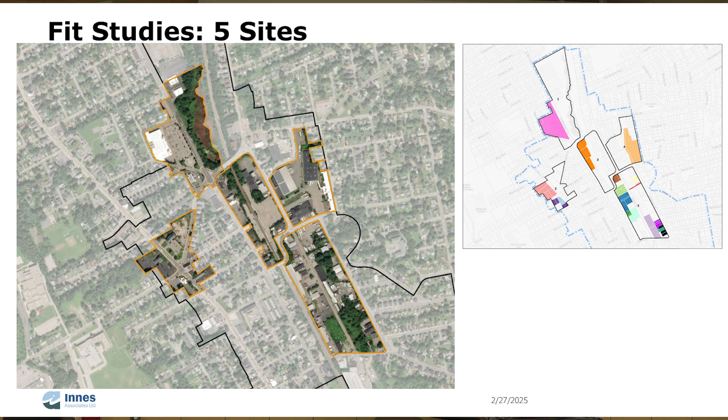So we have selected these 5 sites, and we are going one by one to see what we have proposed. Just keep in mind, this doesn't mean that this is going to be the result. It's just one possibility that we envision. And this is very long term. It doesn't mean that it's going to come tomorrow. This is something that could happen in the future.

What we've heard from the residents in the previous public meetings was about a walkable neighborhood, more commercial and mixed use. Commercial, not the car-oriented type of development, but more pedestrian. So a little cafe, a small restaurant, a convenience store, things that are a smaller scale and for people walking. So we took that into account, and what you can see here is the existing.

We have the Stop and Shop, we have the big parking, and then Albion Street has a different level, so it's going up. Let's say that this is 0, and going up is 1 level up, so 10 feet up, and then again we go back down. So we are taking that level difference into consideration for the plan, and we will see it later.

One of the biggest changes that we are doing, besides obviously giving a mixed-use area where we have commercial towards North Montello Street, is we activate the wetlands area and have it more for public engagement, so people are able to use the space. And then the residential areas will go in the upper levels or towards Larrie Avenue, Newton Avenue, and Albion Street.

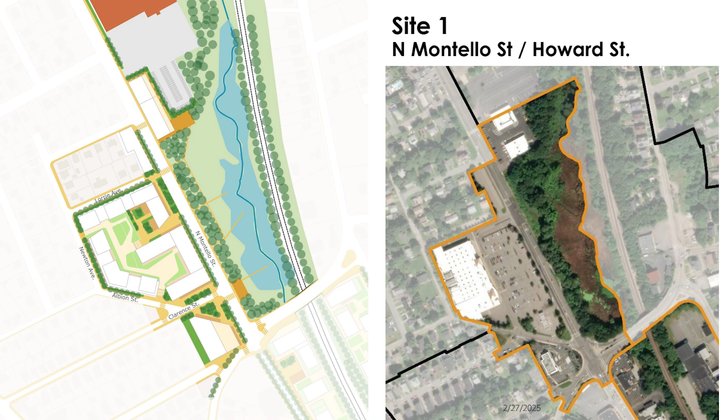The biggest change in infrastructure is that Albion Street ends when it's connecting to Clarence, and Clarence Street is being extended. If you look at the existing, Albion continues, and we have here this big node of traffic. We are trying to avoid that and make it as safe as possible. So cutting here and making Clarence Street continue towards North Montello, we break that node into 2 different places, so we have less traffic in these nodes. That also gives us the opportunity to have a square and space for more green areas and resting areas connected to the crossing towards the wetland.

So we have here a little bit more demonstration. Every site has a board which is going to be over there. And what we would love is, after I make the explanations, you can ask questions if something is not clear, but also you can put your stickers or your comments so we can take them towards the final draft. So what we have here is the plan in more detail.

We have this section that goes from Newton Avenue towards North Montello. We see here on the back of the site the level difference. So we see Newton Avenue is higher than North Montello. We are taking that difference of height to have the parking in this gray area. And what that gives us is the opportunity to build on top and have all the residential on top.

That also allows us to have an upper level square that can be public during the day for all the neighbors, and that can be closed from the entrance. Here we have the stairs, and here the others. So these areas can be closed, and during the night, only the residents will use it. This also gives us the possibility to have different public squares. We tried to do some kind of stepping stone. So we have one here, another one here, and then we have the terrace that we saw over there.

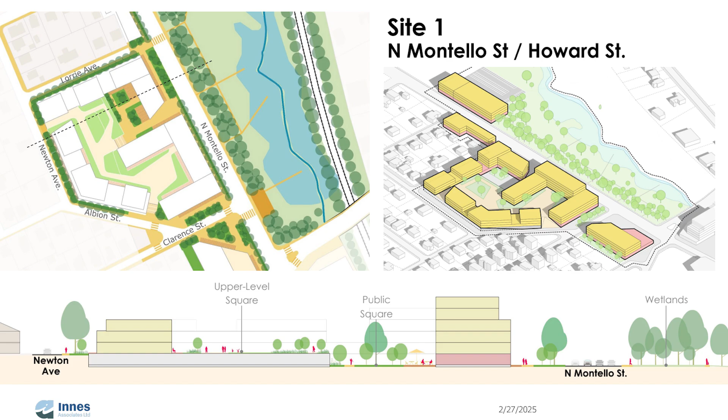So the red color usually means an active use. It doesn't mean that it has to be commercial or retail. It means that it can be some small office, the amenities of the residential, or any commercial and retail. So it's a mix of those. It's something that makes our street more active.

This is site 2. Site 2 is where North Main Street meets Howard Street, this area, this crossing. This is your historic building, Howard School, very beautiful with the chimney. It's something that we wanted to preserve. It's just that in order to make it economically feasible to restore all this, we need to have more building area. So we have some ground floor retail and then some residential on top. This will frame this more intimate square for the residents or neighbors around, but it's a bit more of a discovery kind of a square.

And then we also build around this area so we can enclose it more. Right now it's very open, a very big green space that is actually not being used and doesn't have any function at the moment. So we try to activate it with ground floor commercial and have a more enclosed space, more cozy in a way.

These areas we're trying to make with surface parking, which gives us less density, but around 3 to 4 stories high. We think that is very conservative, but also very good for this street that has a lot of neighborhood around. One of the biggest infrastructure changes here is that we're proposing Wilmington Street to be mainly pedestrian, and only the residents living here could come with their cars and park at their house.

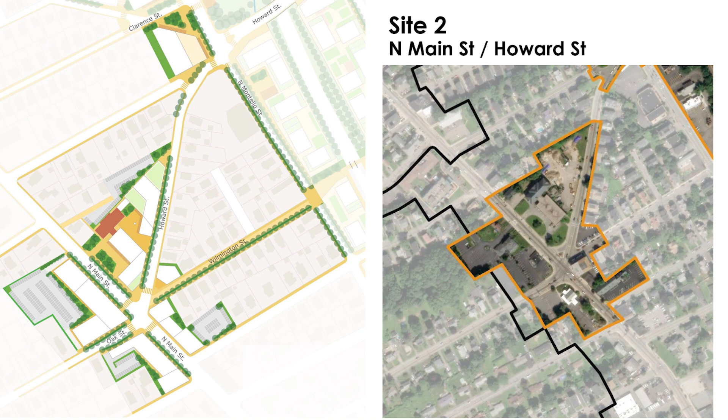And we do that because in the comments we had from people, a lot of the time they don't understand very well where the train station is. It's not intuitive enough. People get a bit mixed up. So we're trying to really make the access to this station very clear. That's why we try to keep the cars out and bring more trees and green.

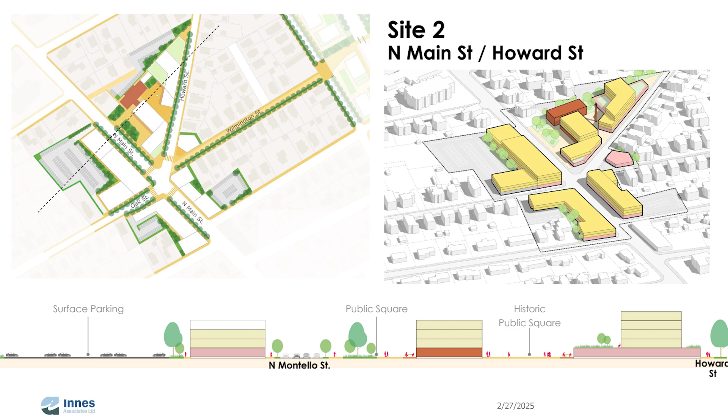So to be more specific, if we do the section in this area where you see the dashed black line, here we have the surface parking, then the building which goes from 3 to 4 stories high, then Montello Street, and on the other side the public square I was talking about. The historic building is on the ground floor, and then we build another 3 stories above. That historic public square would have the chimney somewhere in the middle, and then this new addition, with ground floor retail and active use, and then 4 residential floors on top.

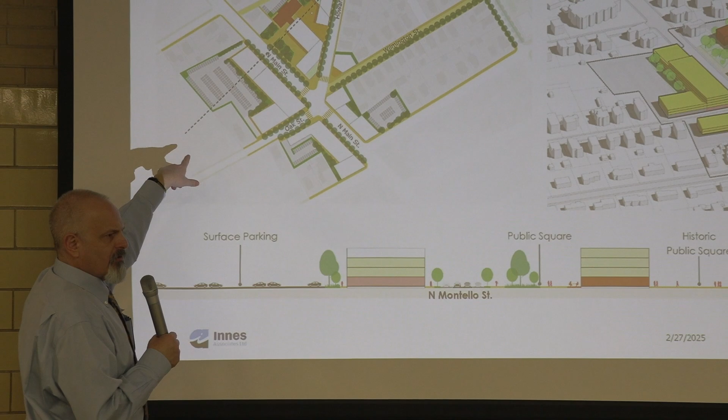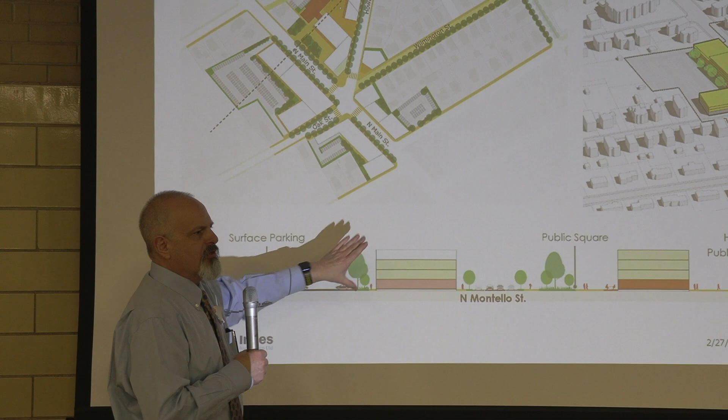I just wanted to say, we all eat and breathe this kind of stuff, but to help understand, this black dotted line is coming through the plan. I know it's kind of hard to see with so much light in here. So think about it like I'm looking at a birthday cake. This is all the frosting, the icing, the candles, all the cool stuff on top. If I cut it in half at this dotted line and open it up, these are the layers. So this corresponds to that. I'm looking at it sideways.

Thank you. I thought it was a good idea. I like cake. That is absolutely great. Yeah, that's perfect. Thank you. Sometimes we get into the technical, and sorry for that. Yeah, thank you very much. So you could look into them.

So if we go to site 3, and if you have any questions, we can go back to the sites and clarify. This is the train station area. Here's Wilmington Street, and we try to emphasize that crossing. A big issue is that the west side and the east side of the train station are very divided because of the rail lines. How can we unify and bring those together?

We have 2 options actually. The easiest one, and I think that is a given whether we do the second option or not, is just to strengthen that crossing at the ground floor level.

So if we do some squares on one side and the other, with the pedestrian street coming from Wilmington, that will give us that nice connection, very visual and very efficient. If we think that there is still a need for another connection from Field Street, it was divided and cut because of the rail, and then you have the other Field Street on the other side, right?

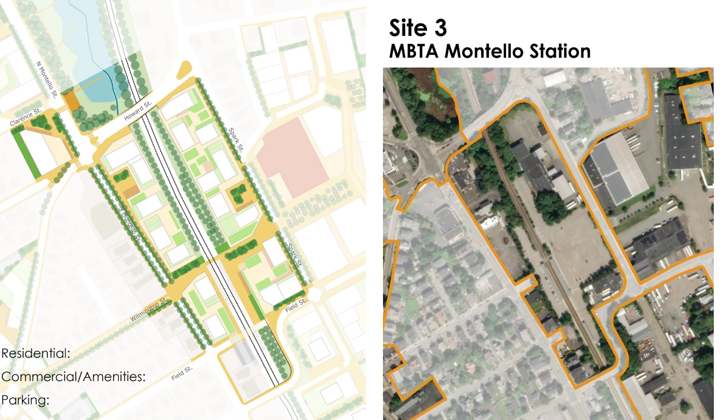So in these areas, what we try to do is very similar to what we did in the first site, having a plinth. This will be easier to explain. So again, the cake, and this dash line is where we're going to cut the cake. What we plan to do here is we have the rail lines, we have the parking, and we build on top. Around 30 feet or even more, depending on the area that we're cutting, is going to be active use. So it's going to be retail, the amenities for the residential, and then on top, we can build.

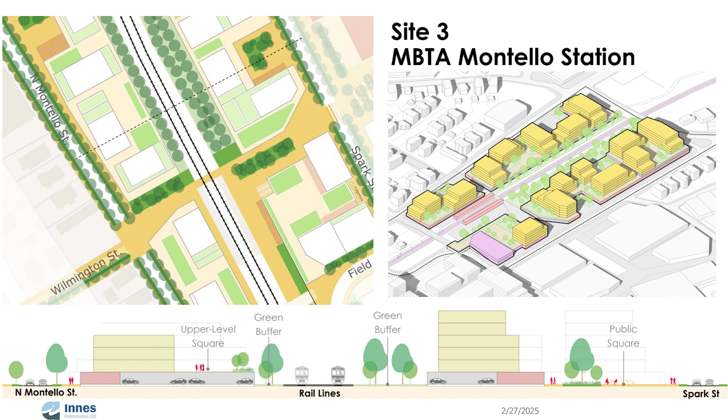This will give us a little bit of density. If we need to cover this by surface parking, this is not possible. Then we go to very low density. We barely can do much in here. So that's why this is what we propose. And then we can give that open space level on top of the parking, right? And that's what you see in here. I'm going to go back so we can see it all.

So all this light yellow that you see is the plinth, and all these white parts are going to be the buildings on top. Then we have some areas which will be those upper level squares that are going to be mainly for the residents. Then we have some cuts at the ground level, and that means that these are ground level public squares. So we have one in here and another one in here. So we can also have some cuts while walking along the street.

And then we have this area, this is Montello's. So in here we have Montello's. Logistics was something that was asked for in the steering committee. They are usually parking in here. That makes this area very unsafe. So we are trying to bring logistics into the front and use this area. And this will be under, if we have some logistics solved with the parking. That is the strategy, because in this area it is very difficult to have logistics anywhere. So that's the place that we can offer.

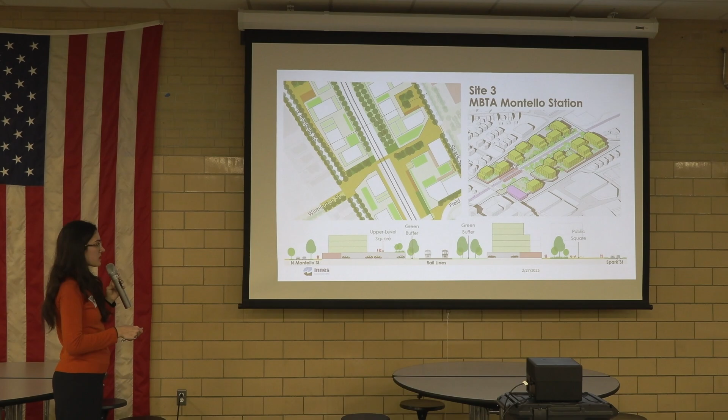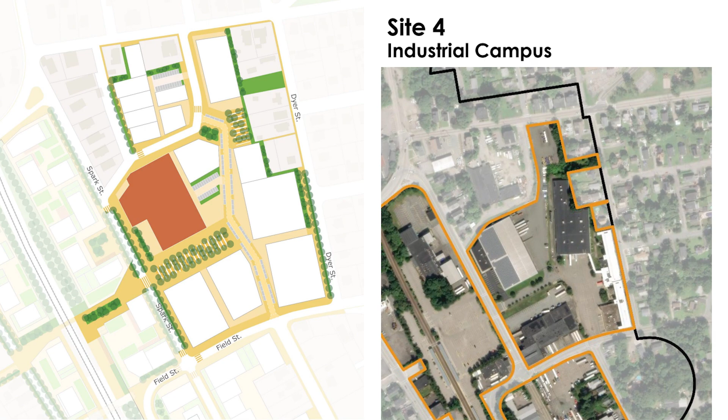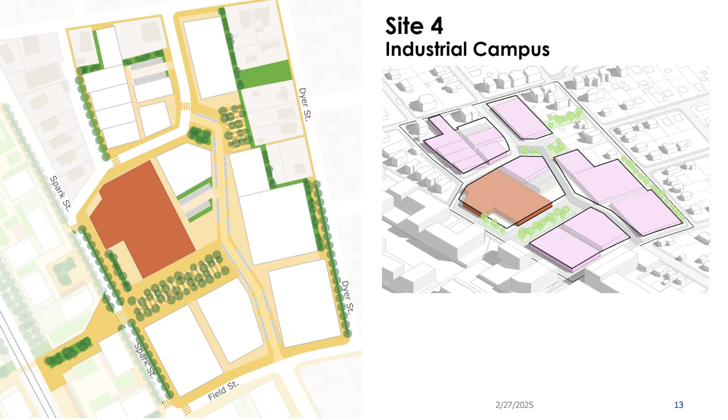We have two, the big main one, and then another one here. We try to always fence all the residential areas with a green buffer, so you see that over there. Here we go to the axle. We were asked to really have the buildings towards the houses be lower, because today Dyer Street can be very in shadow. So the lower buildings, this and these ones, will be on the Dyer side very low, and the higher buildings will come towards Spark Street.

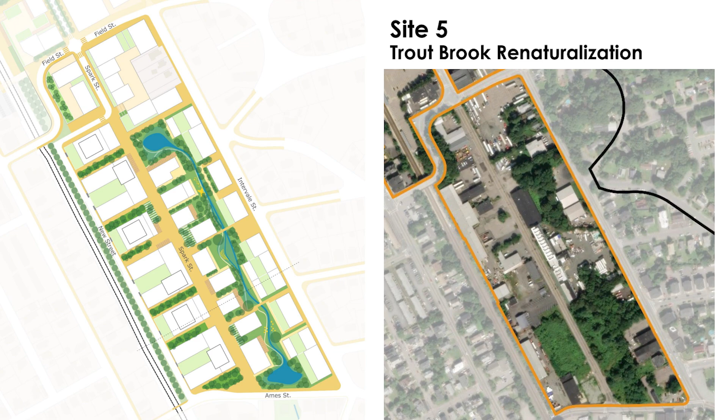And then we have the opening of the brook, also adding some topography so we can have some water storage. And we have one on the upper part and another one on the back. We have some new brooks opening. And with that, we create a new landscape area in between, so these buildings, which are commercial and residential, can live on the park.

Now, if we go to the section that Kate cut in here, we have this dashed line. If we are cutting here, this is what it looks like. The west part of it, the one that is looking back to the rail, that's where we put all the height. That is something that I also want from you. How do you feel about that? Is it too high? Is it too low? We want your opinions on that.

The middle ones, more in the park and the pedestrian part, are very low, going to be three maximum. And we can have some of these be some kind of pavilion, community center, really to bring the neighborhood together.

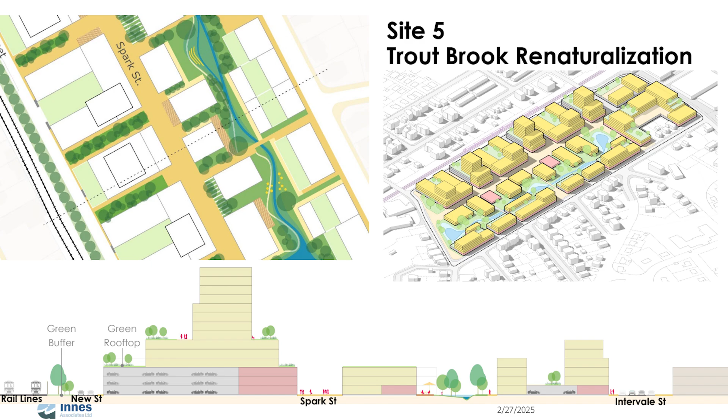Alrighty, hi everyone, my name is Matthew Messery. I'm a resident of Brockton. I live on John Drive, just up the street, but I also work at Over Under. So I'm sure if you guys have either been to the meetings or not to the meetings, this is a lot of information, right? So we want this information from this plan to be accessible to everyone, okay?

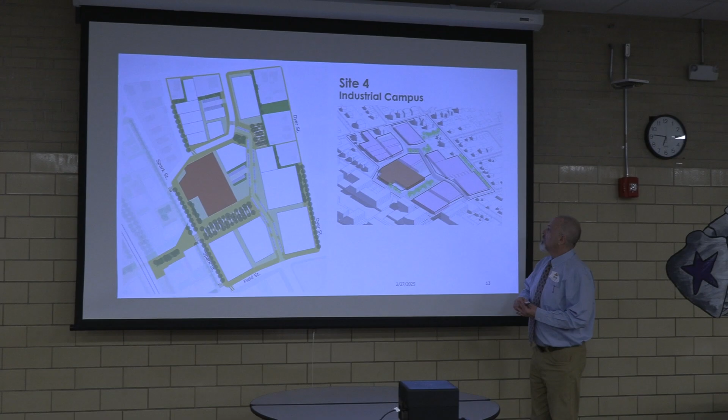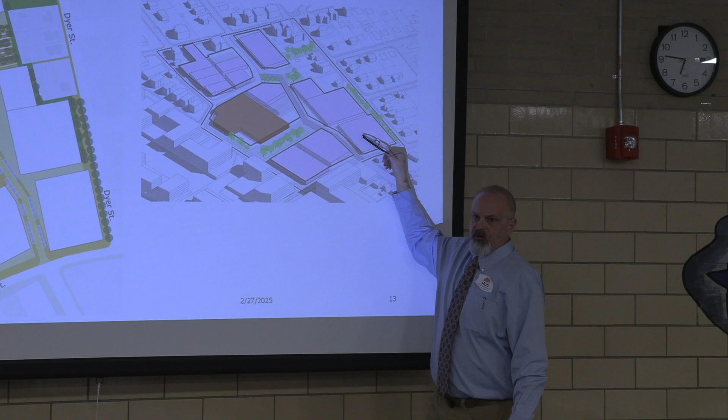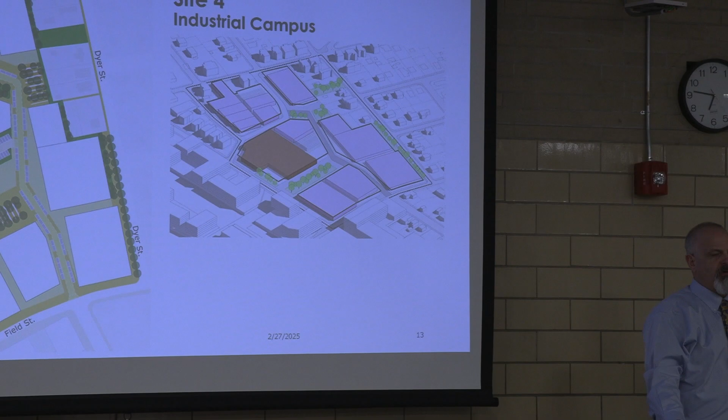So I think Rob's going to point out the red color there, and you'll see it more when you look at the slice of the cake as well. So this is, just to give people orientation, where the FootJoy property is. And there's a lot of open parking lot that could be redeveloped. And so we're hoping that this whole area becomes more of a job center and a place where tax revenue is being generated. And then along some of the other streets, you'll see that there's more commercial development on the first and second floors as you go up and down Main Street or up and down Sparks or up and down Intervale.

My question again is, I came from Brookfield back in the 60s. Everybody had moved into Brockton, and Brockton probably longer than most of the people in here. But most of the Brockton people that work go over the Howard Street Bridge. Have you thought of that, and how are you going to help the traffic of those people who are working hard to get on Montello to get onto Harrison Boulevard, which is the only way to that area? Like widen it or something.

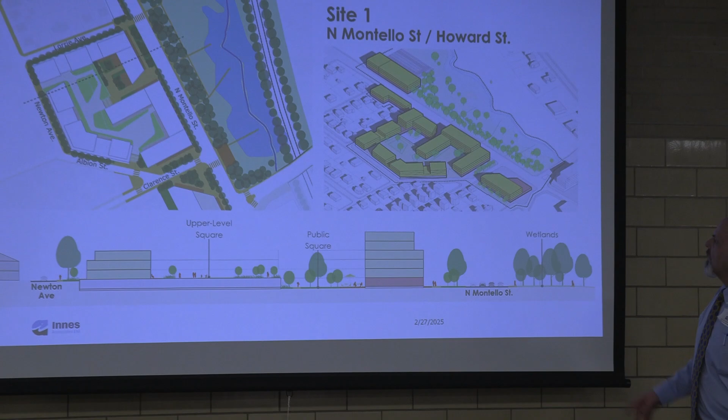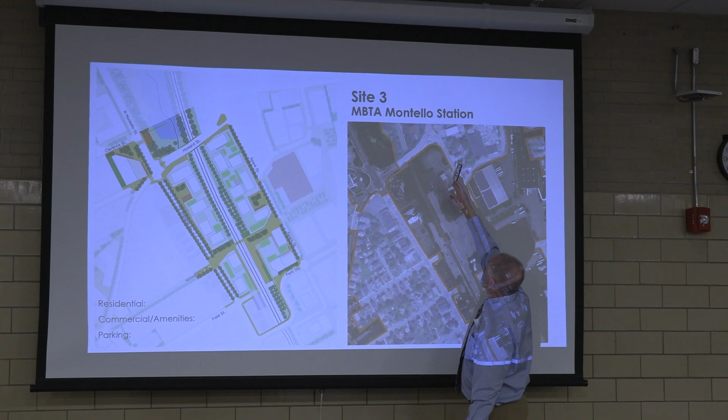Can you go to that slide? Do you have that? Yeah, the whole line. Right there, yes, Site 1. Clarence Street. There. So this is an intersection. This is North Montello and Howard, and this is Sparks and Howard. And so that's an area that we're going to have to study a little bit more.

That road at Howard Street is so freaking wide, and I think we've talked about pinching some of that off to narrow it and make the lanes line up better with each other. And then we're going to have to do an intersection study to figure out how that works. Because as you come around and then you have Winter, which is where the stoplight is, it all backs up and you can't get out on Sparks, and so we're gonna have to figure out how that whole intersection works, which is another planning study.

Yeah, and sorry, I did want to speak to that. The neighborhood plan introduces the concepts for the infrastructure change, but you're gonna have to have civil engineers and traffic engineers look at how that would actually be realized. But to Rob's point, and to what Paula said earlier, the idea is to clean up that intersection to make it easier to go through more safely than it is now.

How many more cars are you bringing into the area, because you're gonna have parking, right, and how many spaces per unit? Is it 1.5? You know, I just watched the fairgrounds go, and we talked about how many spaces are gonna be out there, and how many units are gonna be built in a little area of 50 acres. So you just asked a classic question at a zoning meeting, and I'm so glad you did, because it allows me to bring it up. Did we calculate the parking spaces that you used for this?

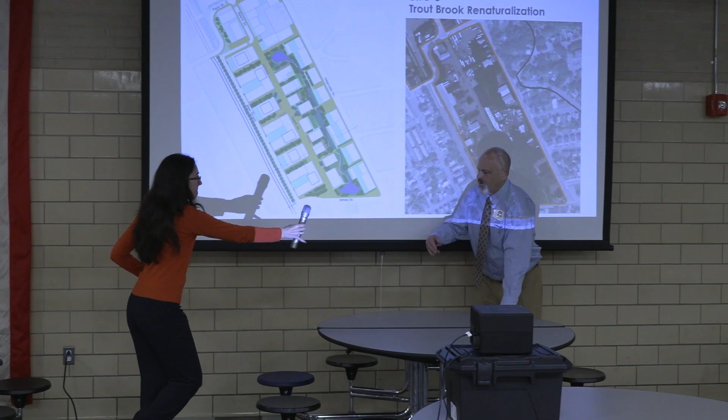As part of the Two Rivers plan that we've been working on, there is a way from Ames Street to come down and into Tukas Park, and then Tukas Park can continue all the way down to... I'm confused at the moment, sorry, I'm getting old. CSX Rail Yard? And then through that, there's some industrial area, all the way down to, begins with a P, Puffer Park. Yeah.

And so there's this whole corridor of mixed-use path, trail that connects and celebrates the river rather than putting it behind a fence like it was bad and in prison.

Any other questions? So there's a couple of other things that we wanted to make sure everybody understood. Zoning is not the only control on developments. The gentleman over there mentioned concerns about fire safety. The building code comes into effect. It requires specific distances between buildings, sprinklers. The Board of Health comes into effect for some of this. The Conservation Commission, there's a brook there, there's wetlands there. All of those rules still apply, so the zoning is only one of many things that control what can happen.